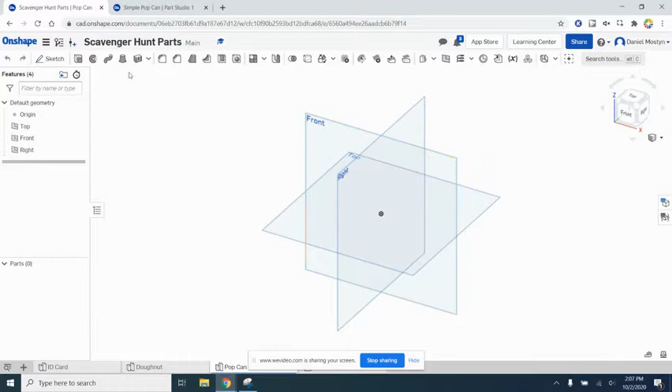So we're going to go ahead and sketch on the front plane. Let's go ahead and make a line. Make it this way. And we're going to make this 2.622 divided by 2. All right, so that's kind of the halfway point of the can. All right, so it's from here to about right here.

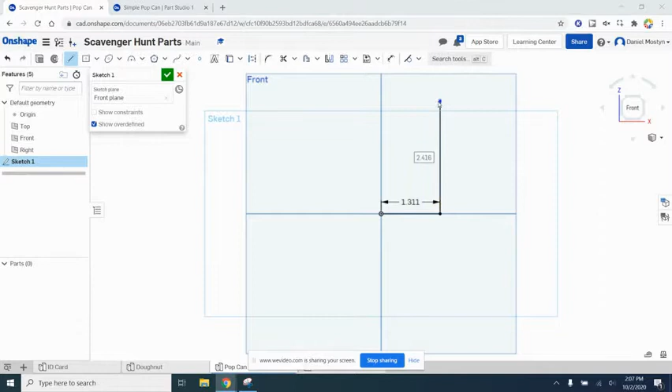All right, let's go ahead and go up all the way to 5.25 so we can get all the way up to the top. That would be the next thing I would want to do. So let's go ahead and go up, and that dimension was 5.25. Okay, so this is like half of our can. Let's hit escape and see where we're at here. Let's move these out of the way.

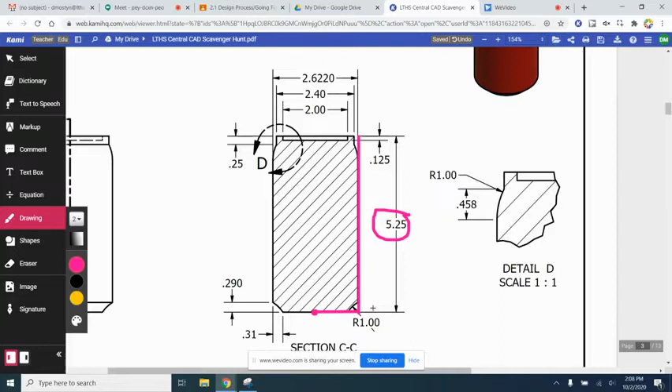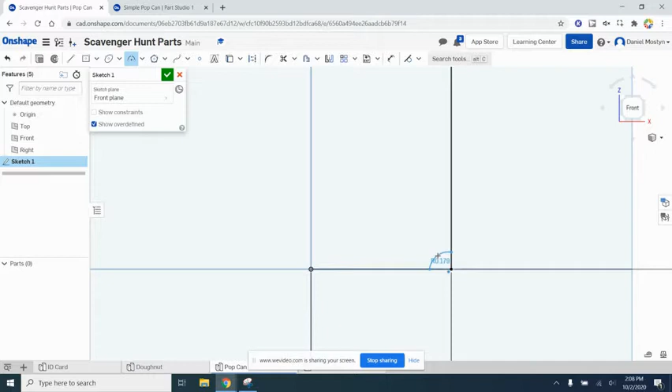Okay, so let's try to see if we can make this little, it's almost like an inverse fillet. It's kind of like an arc here that we're going to make. It's going to be an arc that is 1 inch in radius. So we'll come down here and let's make an arc. I want this arc to be 1 inch in radius.

Now we have to also look at these to figure out what point the arc starts and stops. So it's going to be 0.31 from the edge of the can. So let's put that dimension in. From here to here, that dimension should be 0.31. And then the other dimension from the bottom of the can, the arc ends, 0.29.

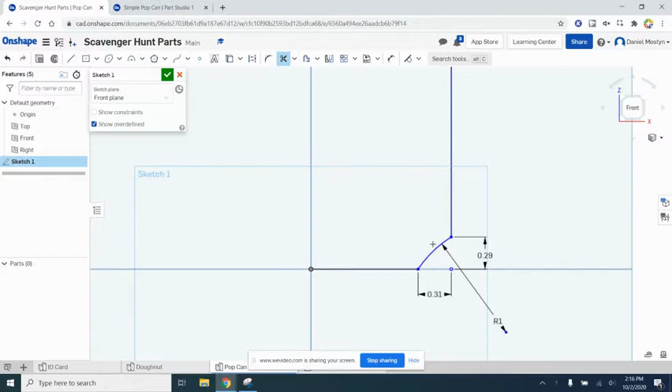Okay, so once we've gone ahead and drawn this arc in and its distance away from this point, we can go ahead and trim away some of these lines like this. And we'll leave this point in here because it helps us to figure out how far away this arc is going to be. Okay. All right, so the next thing we're going to do is we're going to start focusing up on the top of this can. So let's look and see what we have going on here.

So what I would like to do is to kind of come up here, come over, and then come down like this, so that way we sort of have the outline of the can, and then we could fill in the details up here later. Okay, so let's go ahead right now. We're going to come over from this point right here, and we're going to come over like this and come down back to complete our loop, and then we'll finish off the rest of that later.

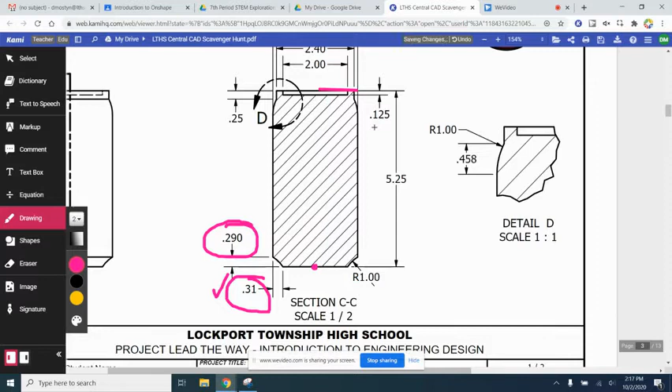Okay, so what we want to do is we want to grab the line tool, and we want to kind of stretch out here until you see like a green line. You see that green line that pops up? That means that we're in line with the origin and the original spot. So we're going to go ahead and draw this in, and then we're going to complete our loop.

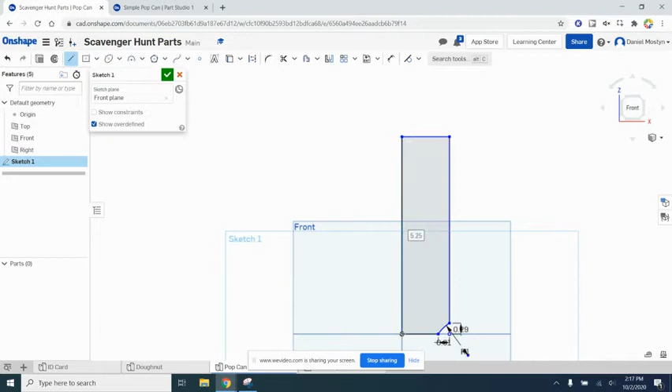Now this isn't perfect because we have some work to do in here, right? We have some detail to put in over here. We have an arc to put in over there. And if we look up here, we can see that it sort of looks like this. Let's zoom in a little bit. So there's a point right here where we arc, and we arc this way, and then we go straight up. All right, so you can see it on the other side of the can over here.

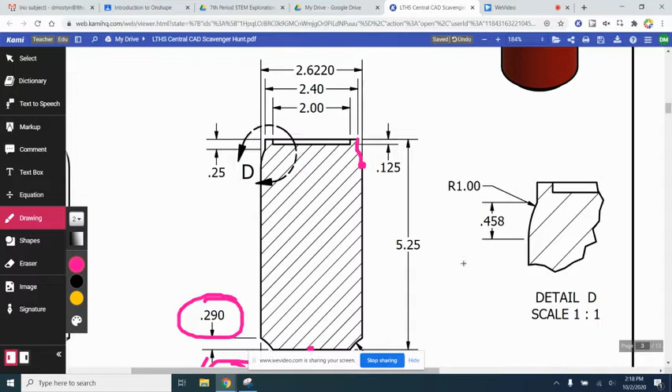We arc, and then we go straight up. All right, so let's go ahead and just kind of draw an arc and straight up, and then we'll put the dimensions in. All right, so let's find our arc tool, which is right here. Let's zoom in. We'll just kind of guess. We'll say we kind of arc sort of like this, right? That's good. And then we go straight up like that, okay?

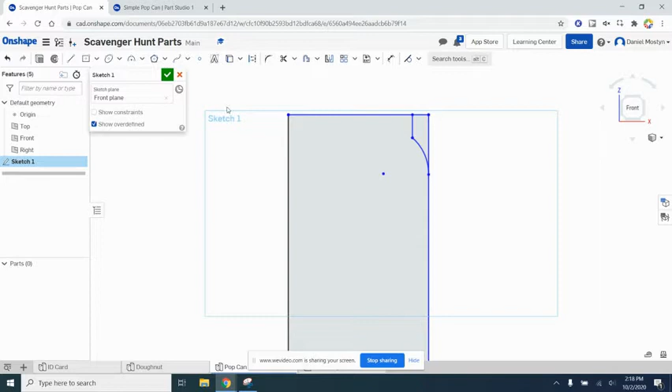Now we know that this isn't perfect right now, and that's okay. Let's go ahead and start putting some dimensions in. All right, so let's go ahead and look here. We want to look at kind of the top of this can. We want to try to get some of these dimensions in as well. So let's do a little erasing. If we look back over on Onshape, we have a few lines that we need to dimension. So let's go ahead right now.

We want to dimension this total height of the can. Total height of the can should be 5.25. All right. The width of this can should be 2.622 over 2. That comes from right here. 2.622 divided by 2 is half of the width of the can. All right, so now we have that in.

Let's find out what this little lip is right here. So this little lip is, if we look, and let's see here, it's right here. Total lip is 0.25 inches right there, okay? So from here to here. So let's make sure we have that 0.25, okay?

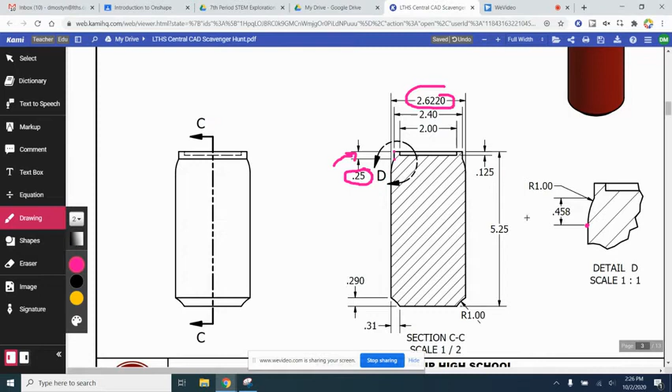Right. Now let's go ahead and make sure that we have from this point to this point figured out. So from here to here, vertically, is another one. Right now it's 0.2885, so we need to make sure we have that right. And it looks like that's this dimension right there. So we need to make that a little bit longer, 0.458. Oops. 0.458. There we go. All right.

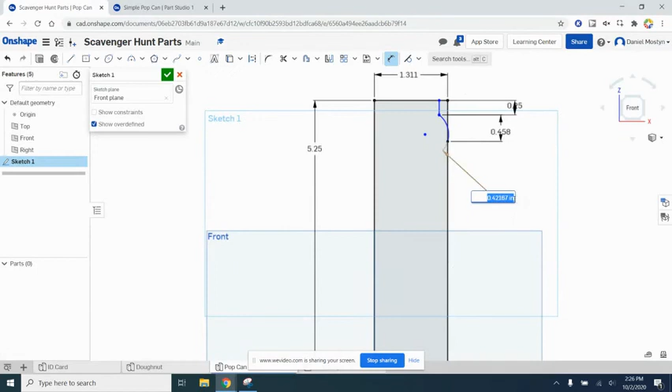I think at this point we're probably ready to put in the width or the radius of this arc. And if we look back over here, the radius of the arc is 1 inch. So let's put that in 1 inch like that. And now I think everything kind of lines up pretty good. Ignore this little black line right here. We're going to do some trimming. We can trim this line and this line. I think now we have pretty much everything we need to revolve our can. All right, so I think we're good to go.

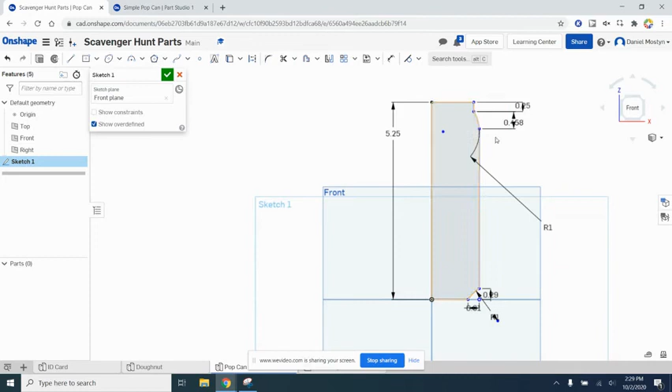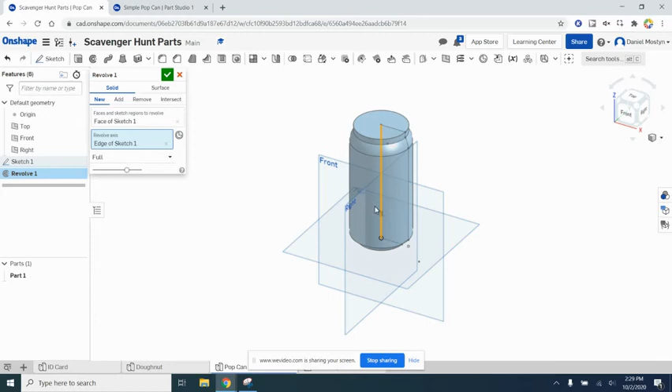So let's go ahead and we'll finish this sketch. And it sort of looks like a pop can a little bit. Now all we have to do is revolve it. So let's revolve this thing. Okay, so there's our face. I just chose the face of the sketch we drew. It's that gray color, so we know we're good to go. Revolve axis, let's select the middle of the can. And there we go. It revolves around, and yeah, that looks like a pop can. So we'll hit OK. We have a little bit of detail on the top that we need to do, though.

So let's go ahead back over here. Let's look at the top. We have a little bit of an indentation at the top. Can you see it in here? So I guess it's more like around the edge, right? So this is a little circle that we need to extrude downward. So if we come on out here, well, actually, let's look right here. This dimension right here is important. It's 2 inches. It's a 2-inch diameter circle that we need to draw.

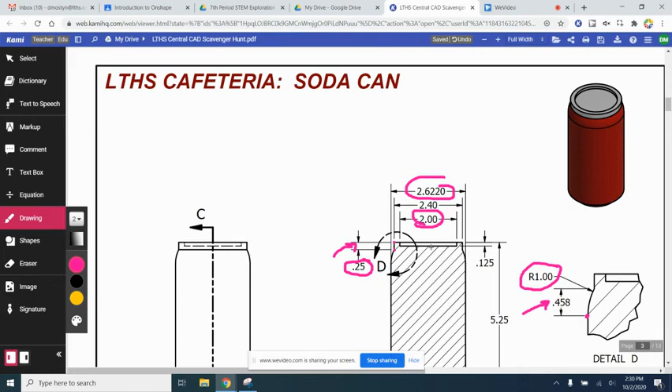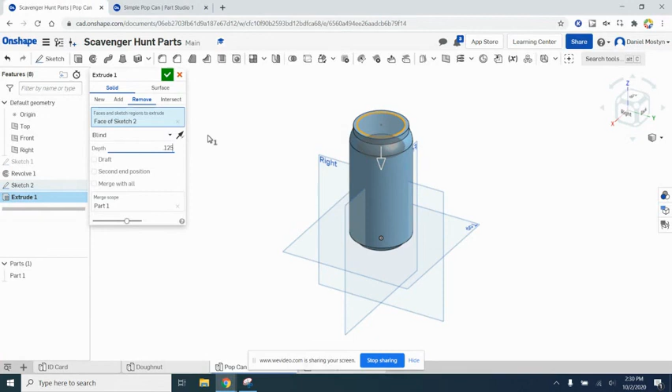So let's go ahead and sketch on the top of the can. We'll pick a center point circle and we'll draw a circle. We want it to be a 2-inch diameter. We'll hit OK and come back out here and we'll extrude downward. We need to remove. We don't need to remove that much though, only 1/8 of an inch, 0.125. So we'll throw that in there. 0.125. We'll hit OK, and there is our pop can.